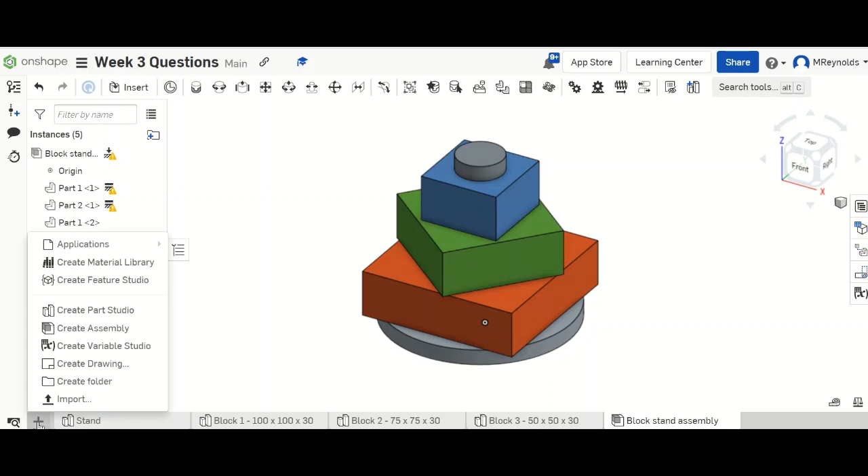So I'm going to insert a new element. I'm going to create an assembly and I'm going to show you how I've assembled this.

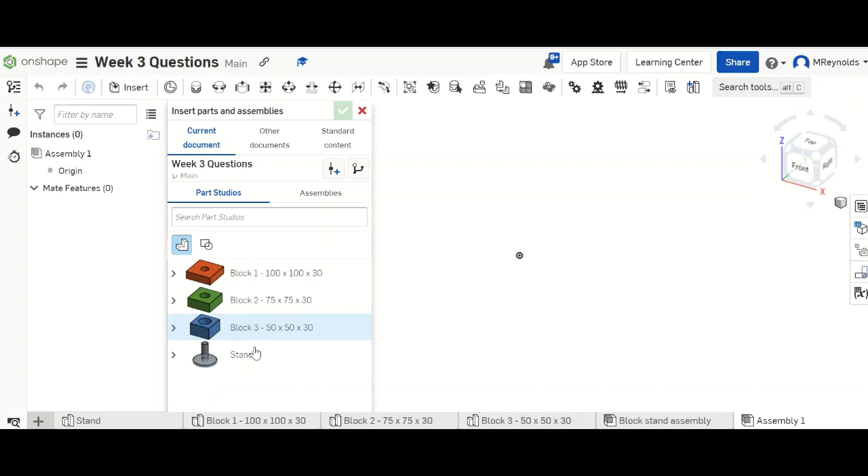First of all, I'm in my assembly now and I need to insert my first part. The base part of this model is going to be the stand. You can see I have all the blocks and the stand here. So I'm going to click on the stand and insert that. I'm going to click the tick. Okay, so the stand is now inserted.

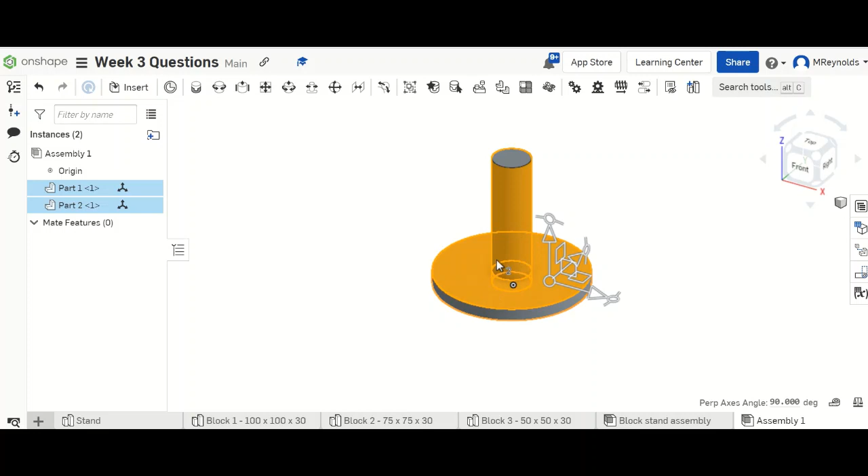I'm going to look at it from a 3D view, and what I'm going to do, because I want to be able to move the other parts when I mate them, but I don't want the stand to move too. So I'm going to click the base, because for some reason they're appearing as 2 separate parts. I'm going to right click and click fix. So now that's fixed in place and I can't drag it.

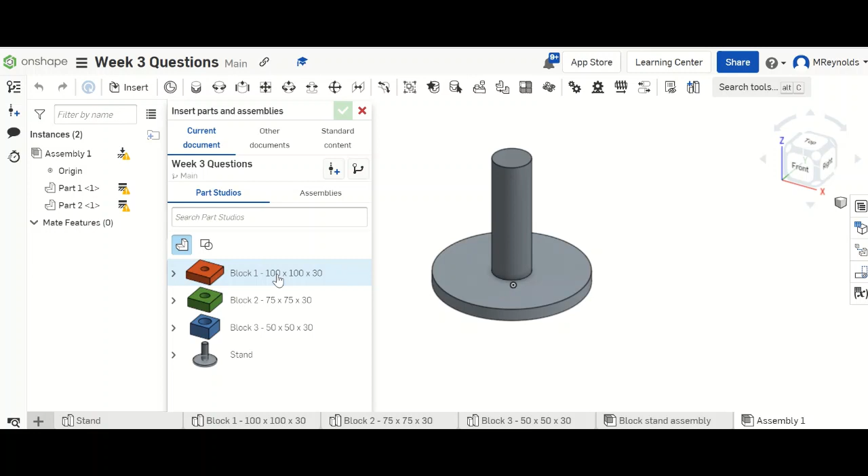So what I'm going to do next, now that I have my stand fixed, is I'm going to insert my first part, block 1. I've just put this red, I've colored them all differently just to differentiate them properly. I'm going to click the tick, and what I want to do with this one is firstly do a fastened mate on this part. So I'm going to click fastened mate.

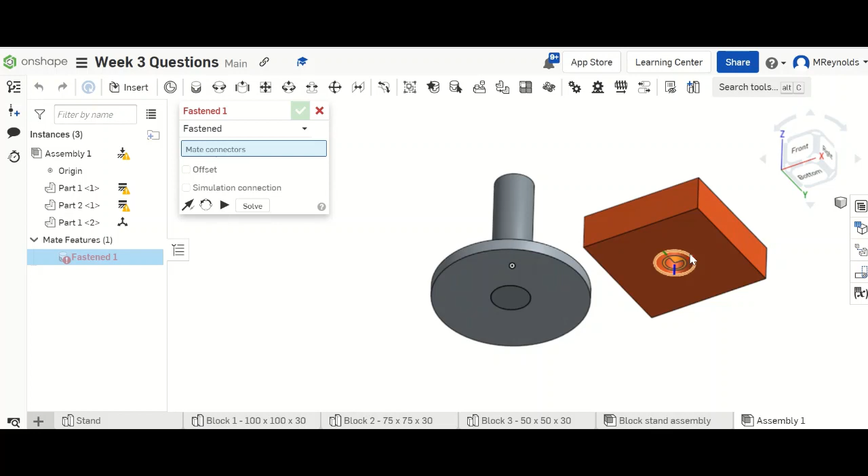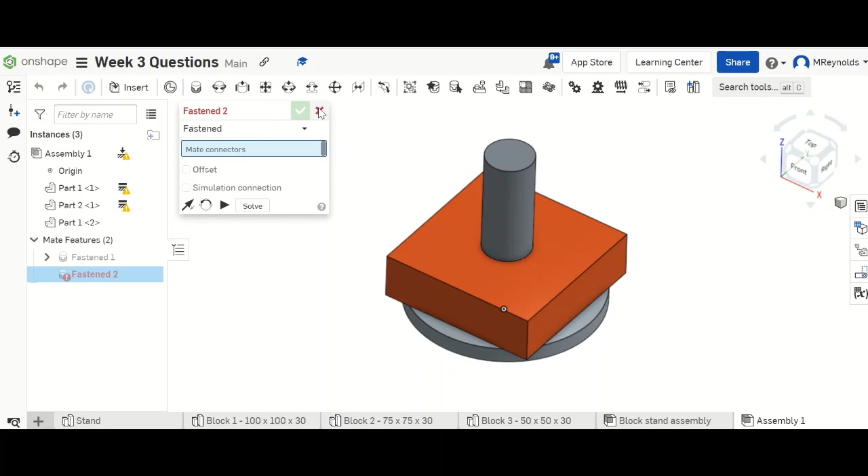I'm going to rotate so I can see below. I'm going to click this bottom edge of the hole, and click where it's going to connect to - this edge where the base meets the pole going up. I'm going to click that, and now it's fastened and it's a tick. Sometimes if you're in a mate, it might come up with an error that it's over defined, basically. If that comes up, just X out of it, or if you accidentally put another mate, just click on it and delete it.

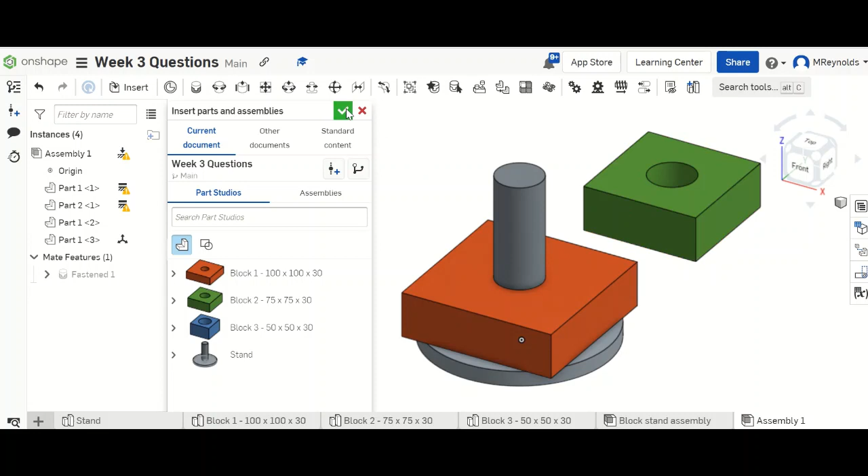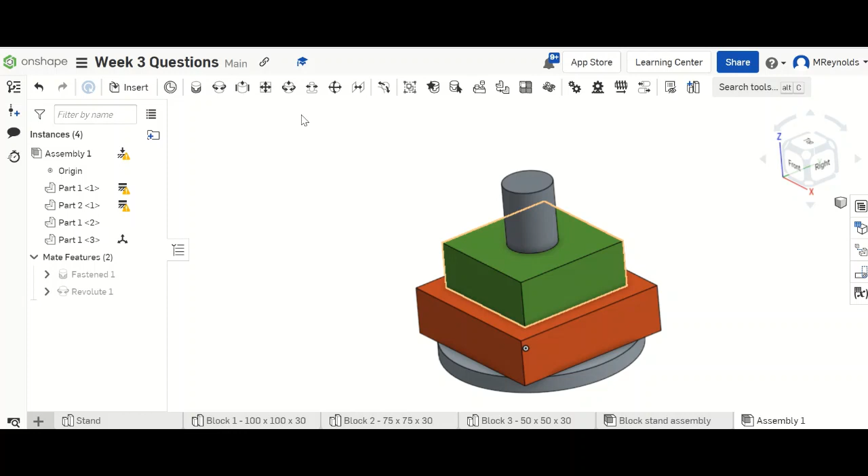So for my next block, I'm going to insert block 2, and I want to add a revolute mate to this, which is going to allow it to rotate. I'm going to click revolute mate, and then click again the bottom edge of this hole, and where do I want it to rotate around - this top edge of block 1. I'm going to click that, and click the tick. I'm going to go back to my 3D view, and now I can rotate this around.

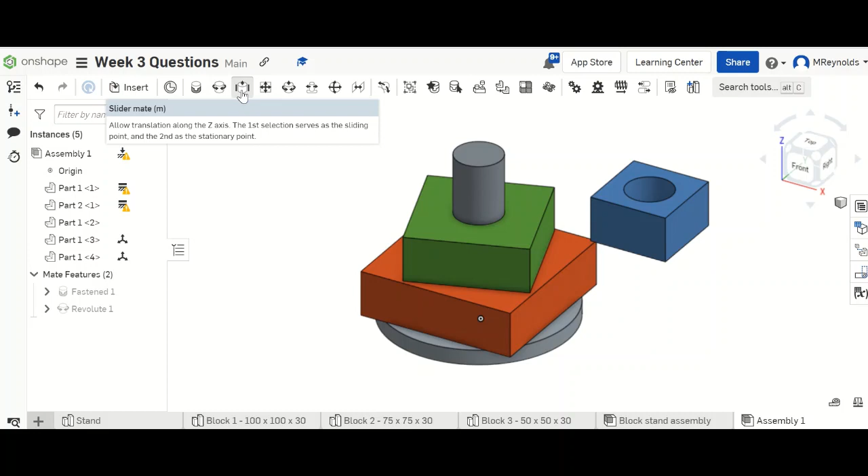So finally I'm going to insert my third block, and place it over here, click my tick, and I want to add a slider mate to this block. I'm going to click the slider mate. Instead of the bottom now, I want to have a relationship between this top surface here, and I'm going to click the top surface of this. So I'm going to click that top edge and this top edge.

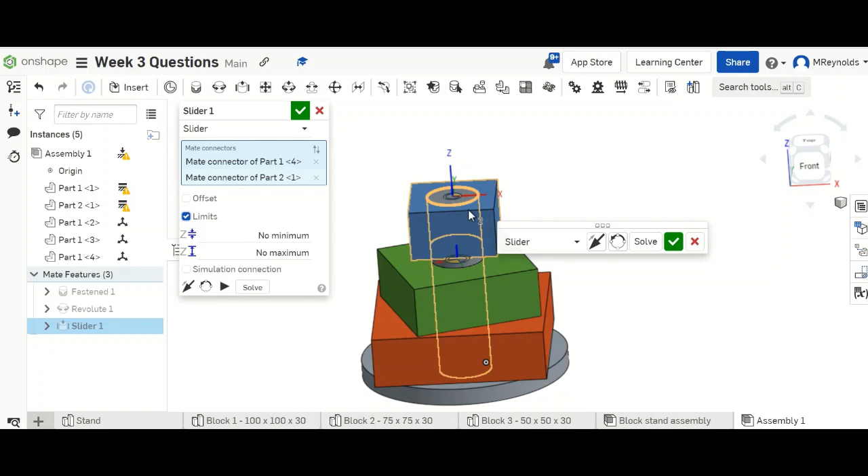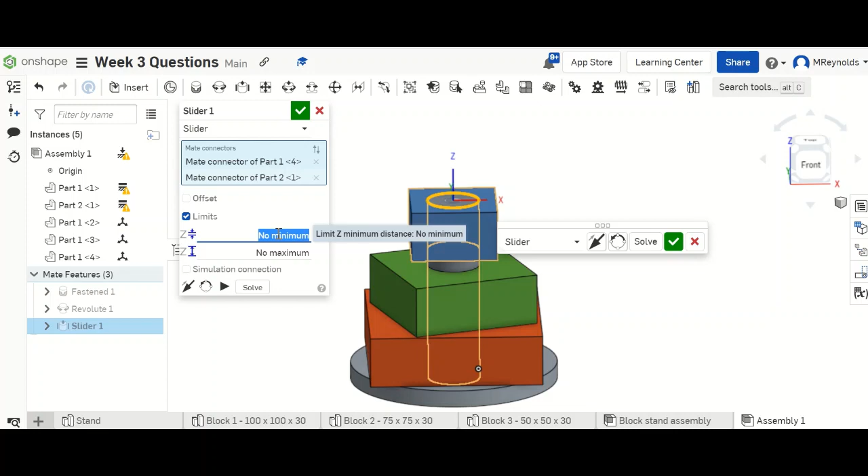What I'm going to do is set the limits. As you can see here, it says minimum and maximum, and these are the distances that it will go along the z-axis between this top surface and the top edge of my block. I was confused a bit myself earlier - I was saying I wanted it to be 10 and like 0.1 of a mil as the minimum, but I didn't realize I want it to go downwards to meet this other block, so I need to put it minus. So my minimum is going to be -10, and my maximum is going to be -0.01.

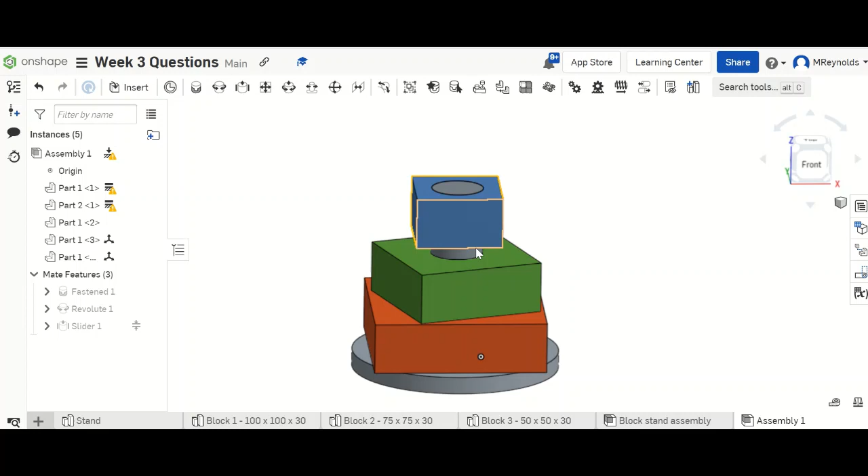I'm going to click the tick, and this is now going to allow me to drag my block up and down. So now I'm going to go back to my 3D view, and here we have the finished model.